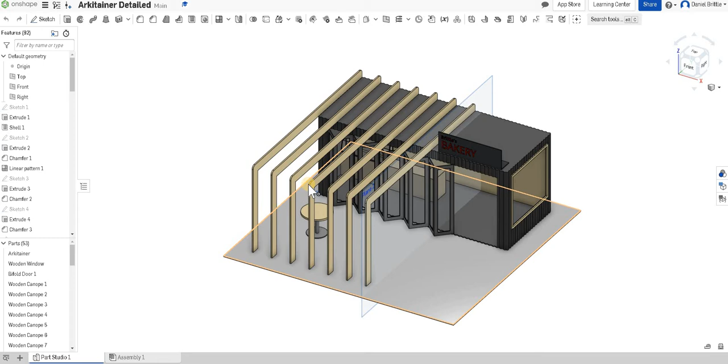I'm going to add a rail that goes from the side of the Arkitainer all the way up to the front and across through this wooden canopy and down here. Just a rail to enclose everything, an extra feature. We're going to use a sweep tool to do it.

The trick with this is that we're going across 3 work planes, which is going to make it quite tricky. So we're going to have to create quite a few work planes in its construction.

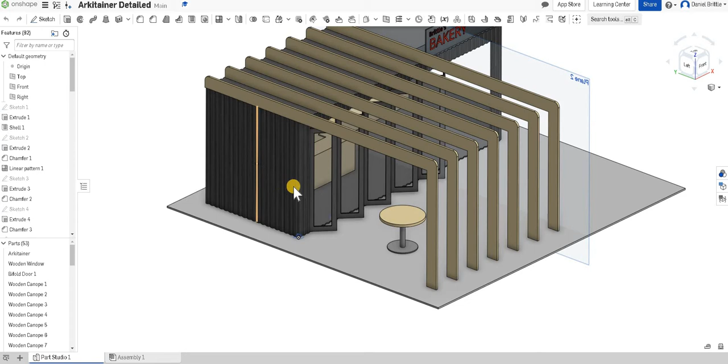The first work plane we're going to create is on this side here. We don't want it flush with the Arkitainer, we want it slightly out into this area. So we're going to select the right hand work plane, using the features list to select it.

Once that's selected, we can click on the plane option at the top here. It's the one that looks like a square with a small square in a corner. Hover over it and it'll tell you it's a plane.

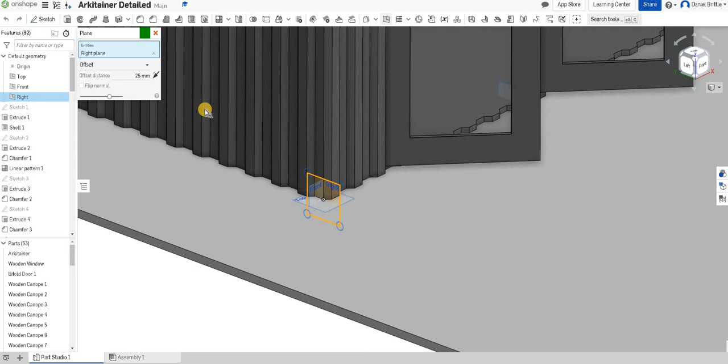You used it before, so hopefully you remember. We can see the arrows pointing the wrong way, so I just want to drag it in the direction I want to go. I'm going to look at it from the front so I can judge how far out that's going to be.

250-ish doesn't seem far enough. I'm going to take that to about 400, so it's much further to the left there. I'm happy with that, so I can finish it with a tick.

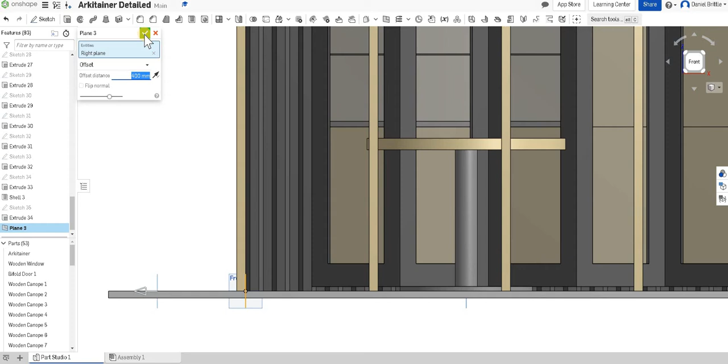Now the next work plane we need is the one that's going to be the height of the handrail. If we use this floor as a guide, we then select the new work plane feature at the top, and we're going to use the arrow again to drag it up.

This time I know what distance I want. I want about 800 from the ground, a very typical handrail kind of height in my opinion. You might well prove me wrong, but that's what I'm saying. And then we can finish that with a tick.

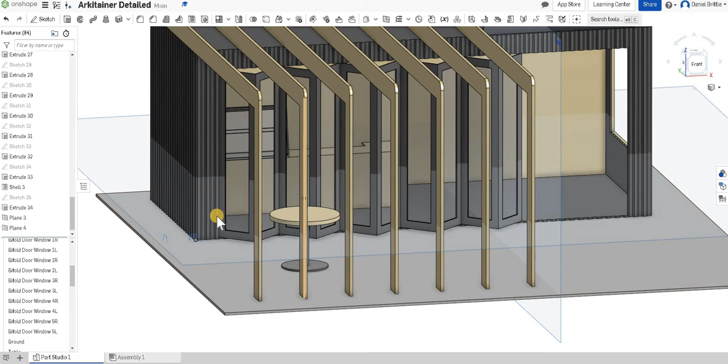The final handrail length is coming up and across along this work plane, and we need to come back down just over this side. It's slightly further, unfortunately, than this plane that we've already created.

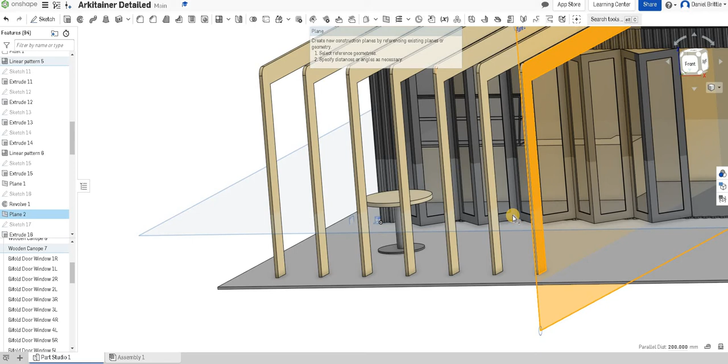So what I'm going to do is select the side of this face, create a new work plane here. In fact, that's the wrong work plane, sorry. I'm going to create a new work plane for it to come down.

That one is going to be lined up with the front work plane, selecting it from my features list. And then I'm going to create the work plane so that it is bang in line with where I want to create the handrail coming down here, which is halfway through this wooden canopy.

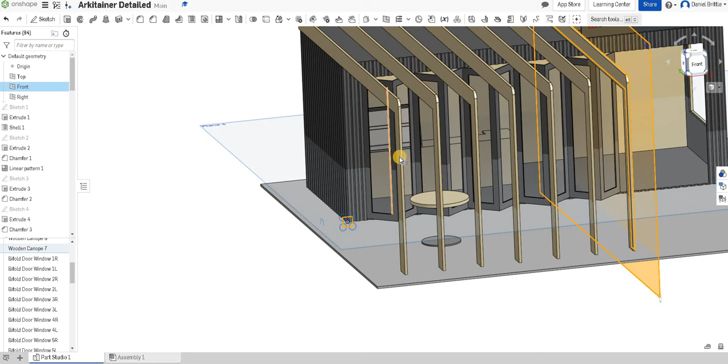So select the work plane. I'm going to view it from the left and zoom in. Actually, I'll just put the distance in, and we'll do it a slightly different way this time.

The distance is going to be, let's say, 1000, and let's see where that disappears to. You can see now it's telling me I've selected too many things, so let's close the 2. I just want the front plane in that options box.

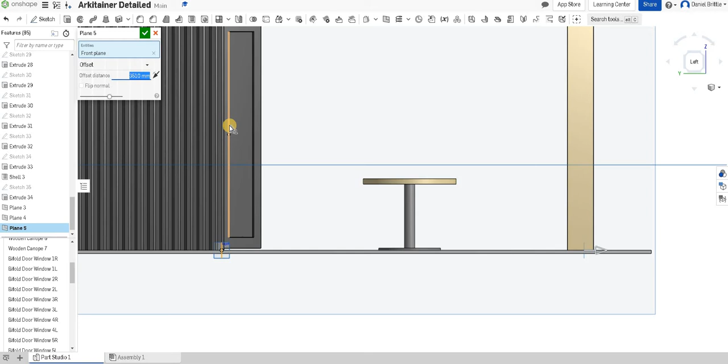You see 1000 is nowhere near, so I'm going to drag it across to about the centre, which looks like it's going to be about 3500. Okay, we can finish up with a green tick.

So now we've got the 3 work planes that we're going to start to draw the line that we want our sweep on. This is the line that the handrail will follow, coming up from here, across with a small round on the corner.

We don't want any sharp corners. All the way to this edge, round again, back through all these, round and down back into the floor. So we're going to start by drawing this section in here.

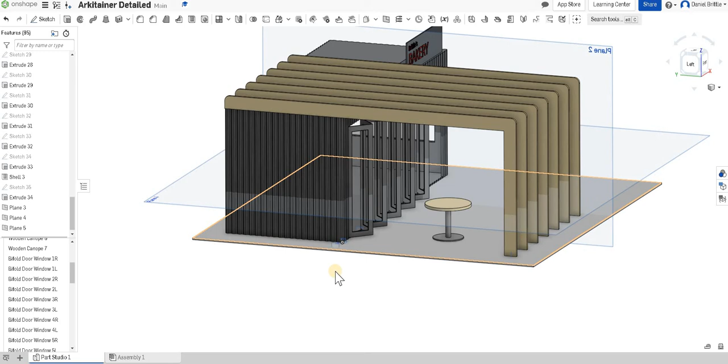I'm going to select the work plane we've just created, which is plane 3, using my features list. Start a sketch, looking at it from the left so it's square on, and I'm going to start by drawing in here just a rectangle roughly where I want my handrail to be.

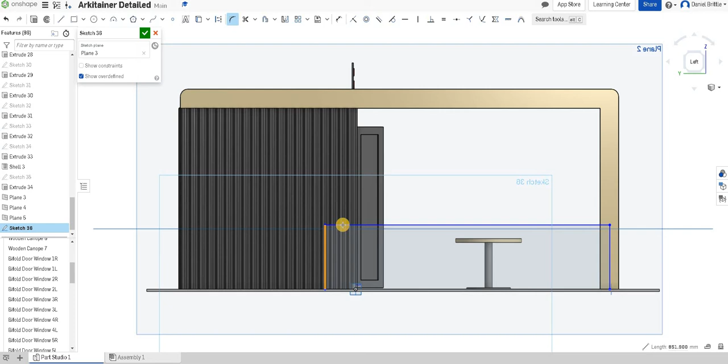I can then curve this edge with my sketch fillet tool. The sketch fillet tool is just up by the scissors, and I'm going to make that 300mm, so you can see it's a nice round there.

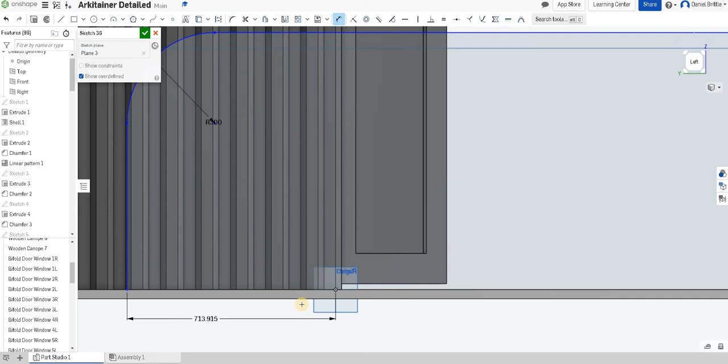I'm then going to use the dimension tool to start showing exactly where I want this. So we're going to measure from this central point, the origin, to the edge there, and we're going to make that around 800 back to start with.

So it's going quite a portion into the Arkitainer there. We then want to measure from this edge to the point. Don't measure off that line because we're going to get rid of that line in a moment, and we're going to make that 4,250. Okay, so you can see it's not far off the centre here.

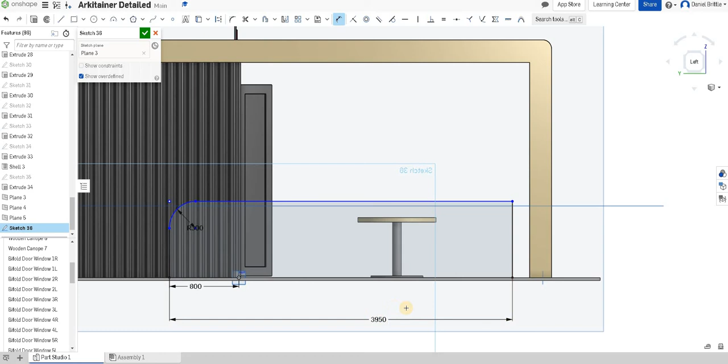We're then just going to take 300 off this to allow for the curve so it matches this, but we're not going to do it on this drawing. So what we're going to do there is take that away from here, which will leave us with 3,950. It's important I don't just jump straight to that number, because we won't understand where we've got that from. So 4,250 minus the 300, which is quite important.

I'm then going to use the scissors tool here, the trim tool. I'm going to cut away the bottom part of the rectangle and this right hand side of the rectangle. So I'm just left with this line that I'll sweep along to here.

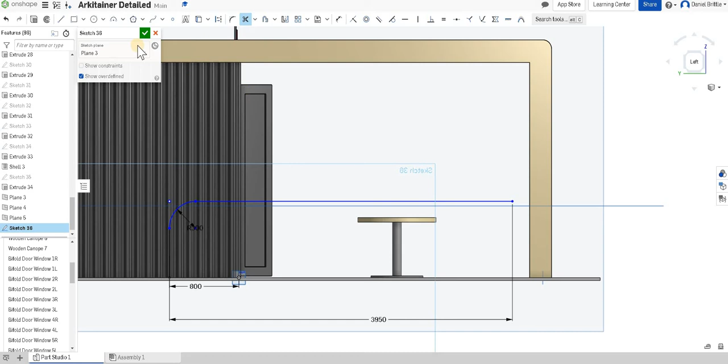The next curve is then on a different work plane, so I'm actually going to start sketching a line now on a different work plane. So I've finished that sketch even though technically it's incomplete. You can see it's finishing there, so it's important. I'm going to try and connect to that point in a moment.

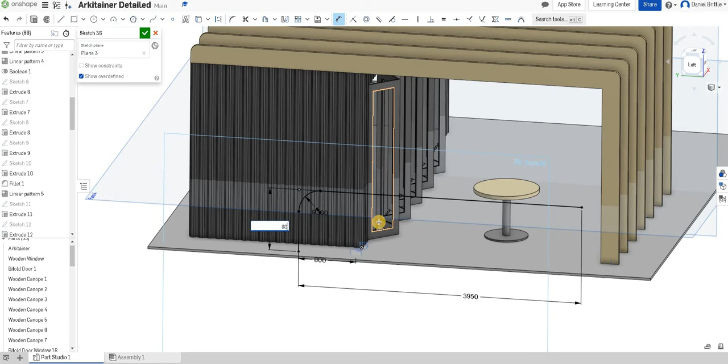So if I go back into this sketch, I've actually forgotten to do the height of the line, which was a bit silly. So I need to make sure that from that point to this line, that should be 800, otherwise it won't match the work plane that we've created. So now that's 800, it matches the work plane and it'll marry up.

So on this work plane, plane 4, select it in your features list if you're struggling to select it on there. We're going to create the sketch, and I'm going to look at it from the top so I can see where it is. We can see the point of the line now is here, and we're going to draw that again as a rectangle, so it makes it a little bit easier. We can then add our dimensions to it.

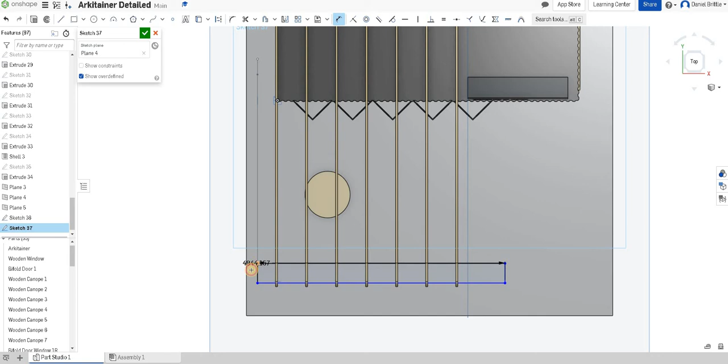So this line here, the distance from there to that point is going to be 300. That's the amount of curve that we're going to add in a second. And then the length of this line, we want it just poking out the side here really.

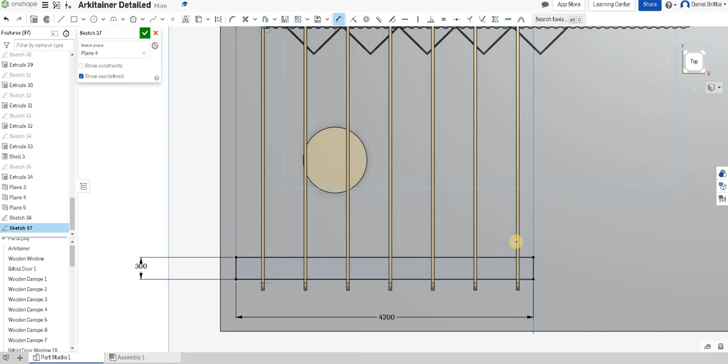So if we go to 4,100 and see where that takes us, that's coming out. I want it a little bit further, so let's go 4,200, and that will do for now. Okay, so 4,200 is good, 300's fine.

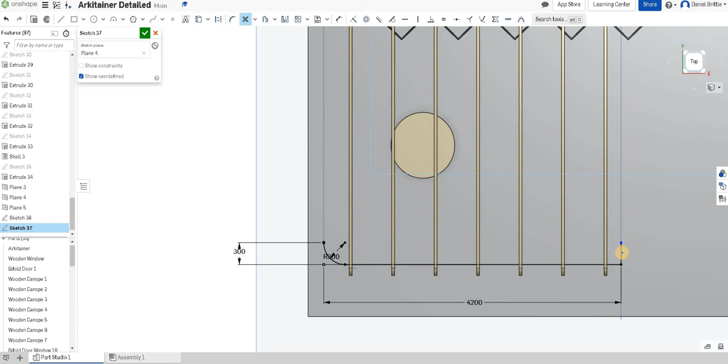We just need to add that curve and trim away like we did a moment ago. So line to line using a sketch fillet tool. That's putting my curve in nicely. Trim this big line of the rectangle, we don't want that little one there either, and that one there we can get rid of. And then if we finish that, so let's click our green tick and zoom out, you can see it now looks like a continuous line even though they're drawn on separate work planes.

The final one is here. So this is the work plane that we've created. It's going to be easier to select that one from the features list. Starting a sketch, and this time I'm going to view it from the front, and we want to carry on.

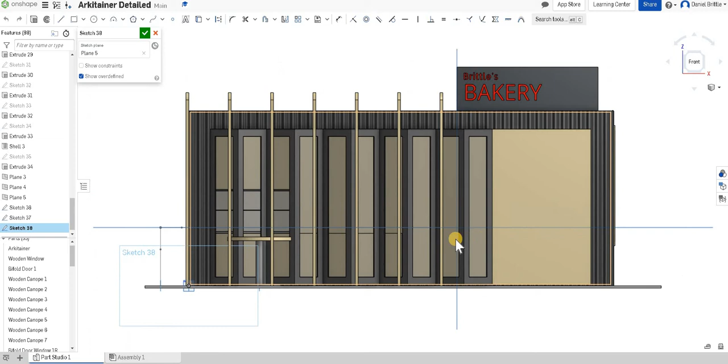It's quite hard to see in there, but the line is roughly here, and we want that to come down, so you can see the lines finishing there. So it's coming all the way through, finishing here, and then we want it to curve down to the floor. We want it to touch the floor so we don't see the end of the pole.

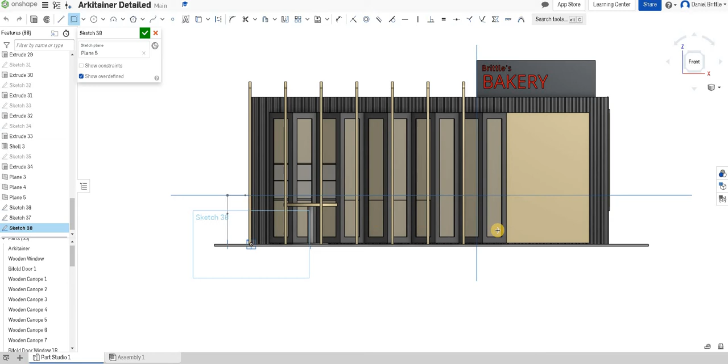So a rectangle again. Hopefully this is going to let me select it quite nicely. If it doesn't and you're having trouble, don't worry, we can constrain it anyway. So I'm going to draw the rectangle on here, and I'm going to start to add my dimensions.

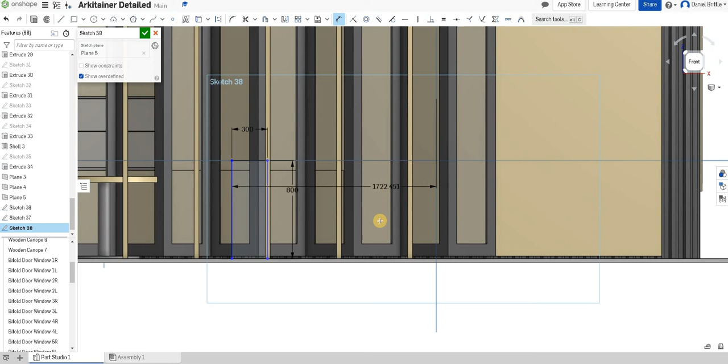So my first dimension is going to be this side here, which is 300 to allow for that curve. The next one this side is going to be 800 to get it to the correct height, and then distance from that line to here should be 0. Okay, so you can see now that should be connected up there, and we'll find out when we do the sweep if that's worked correctly, but it does look to me like that's lined up.

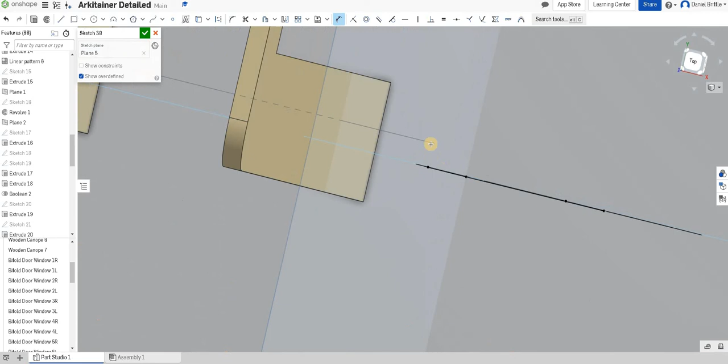So if we rotate that round, you can actually see where our problem's coming from. Our line does not match up with our front work plane, and that's why it wouldn't snap to it a moment ago. So we're going to have to fix that before we move forward, and we'll come back into the sketch in a moment.

So let's try and figure out what's going on here. First, let's figure out the distance that work plane was created. So plane 5, I'm going to edit, and it's saying it's 3,500, measured from the front work plane.

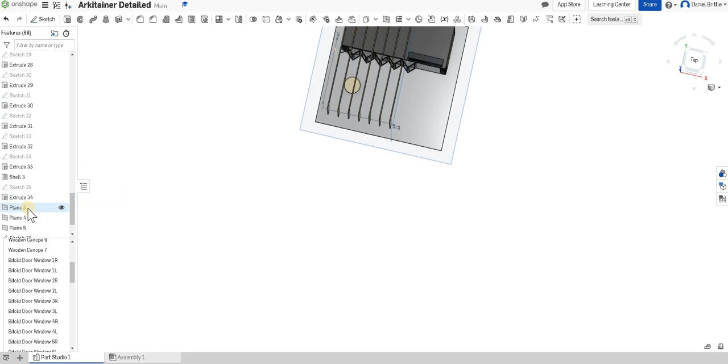Okay, so then if we go into the original sketch for the first line, sketch 36, and we edit, we know that this line was 3,950 from back here, but we don't know what it is from the front work plane.

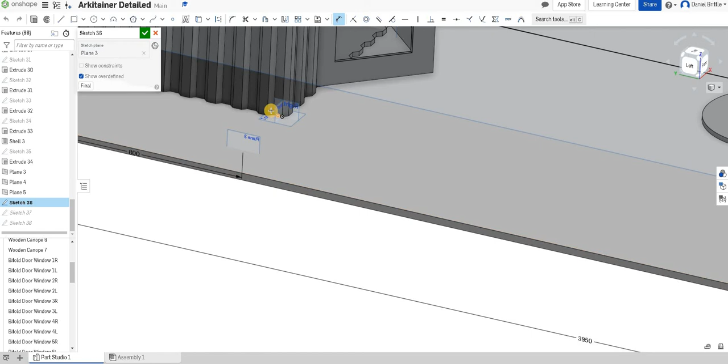So we're going to measure, and we won't be able to change it straight from this, but from the front work plane, so the origin really, to this end point needs to be 3,500, but then allow for the 300 in the bend, which actually gives us 3,200. So that tells us this 3,950 is 50 millimeters out.

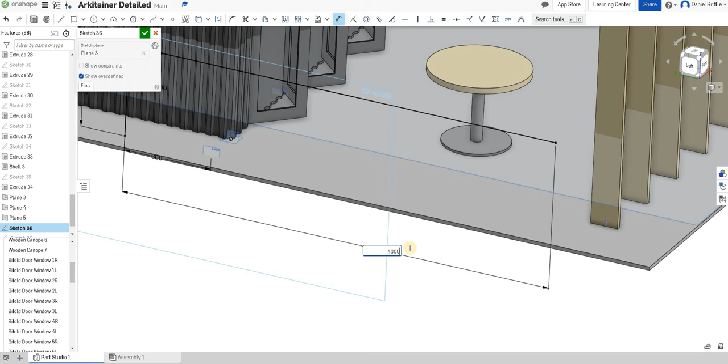So if I just cancel that, okay, let's delete that dimension out. Let's change this to 4,000 and then see where that takes us. I'm hoping now that will move everything along nicely, and we should see that that is now lined up. So it's really important that we're checking our dimensions as we're moving through and checking visually that things line up. It helps you see and spot errors quite easily that you can go in and fix.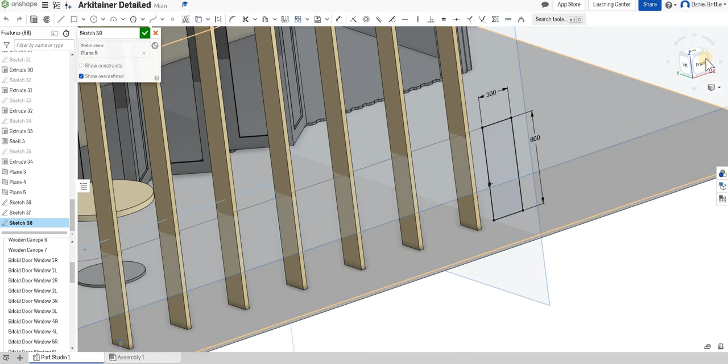So let's go back into this sketch now, looking at it from the front work plane. We're going to add that curve on and delete the two edges just like we did on the other two. So let's go to sketch fillet from the top to the right hand side. 300 is what we want. We press enter. Using the trim tool, we're cutting this side away. That's a dimension tool, it helps if I select the correct one, doesn't it? And then there we go, we can delete those few edges.

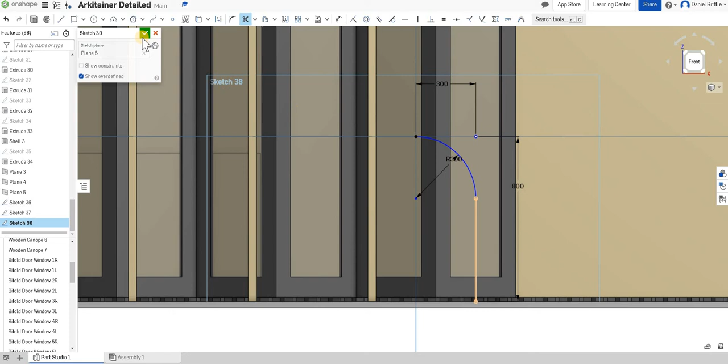Okay, for a sweep, you need two different things. You need the path that the shape is going to go along, and then you need the shape that you want to send along that path.

So we're going to draw a circle on the end, on this point here as the origin. I'm going to use the sketch tool. I want the sketch to be on the floor, so I'm selecting face of extrude 15 in my example, but I've just clicked on the floor. Click the tick, and then we're going to draw our circle.

You could literally play about with any shape you want here, but handrails are typically circles, and I think we're aware of that. So I'm going to go back into here. I don't know why I clicked the tick, that was silly. Circle, draw my circle, and dimension it as well.

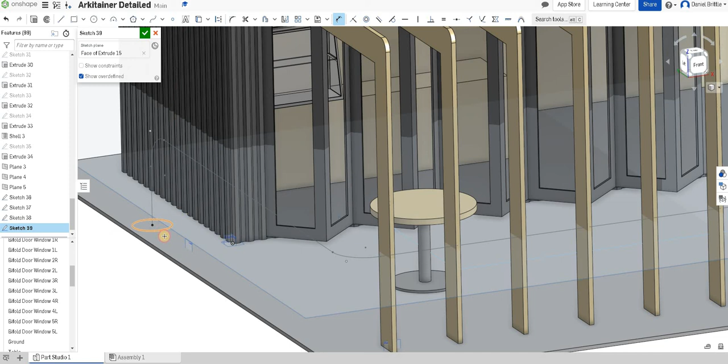And the dimension for this is going to be 80 millimeters. I don't think that's allowed me to do that very well, so let's delete that dimension out and try again. So let's dimension. Now line there and change it to 80, press enter, and it's saying that we're locked at a tangent here.

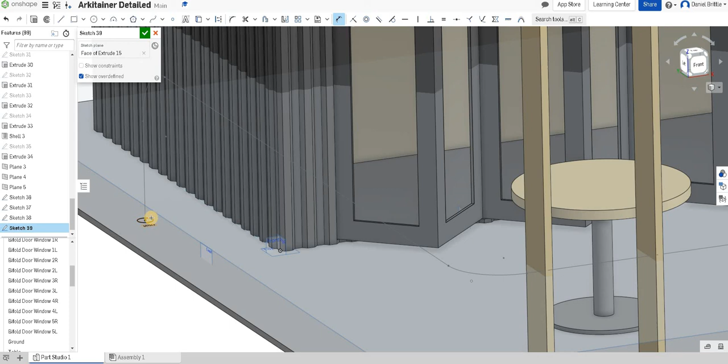So let's delete this constraint, left click on it and delete, and then it'll move there if yours has done the same. Okay, I'm happy with that shape now, so now I can do my green tick. That's the correct point too, not the other one, because then it's just a mistake and you'll have to open it up again. Bit silly, sorry.

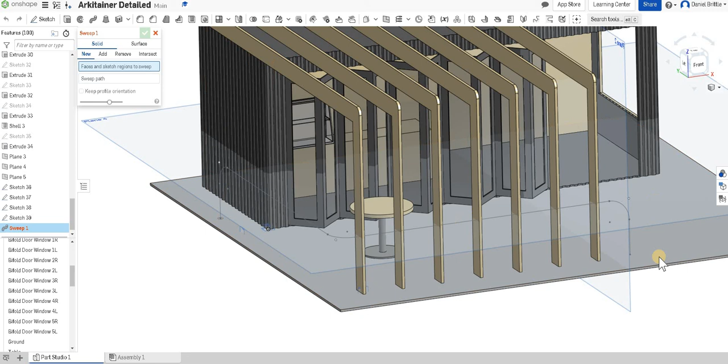So now we want to sweep that shape along this handrail. So this is a good bit. We want the sweep tool. This will not work if this isn't a continuous line, okay? So it's really important we get that line right. It's so vital to make this work.

Just position it in the middle so we can see it all going in one go. Faces and sketch regions to sweep, so that's the shape, that's asking you for the shape that you want to send down that path. So click on it once and then zoom in and select your shape. Next part now, you can see it's put face of sketch 29, 39 sorry, in there as well. The path now, the sweep path, is that line that we spent so long creating.

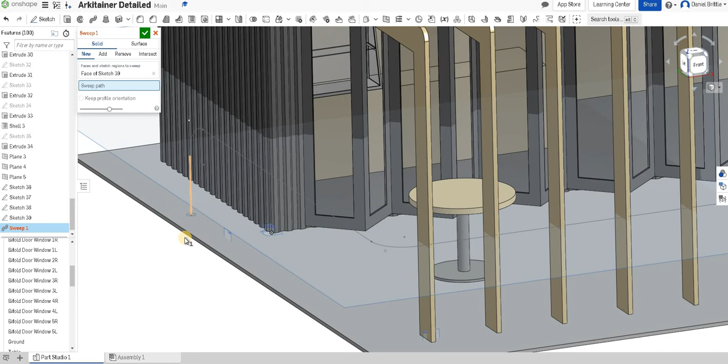So sweep path, and I'm going to select that path there. You can just keep clicking on these lines. Alternatively, you can select all of the sketches from here. So let's delete them edges, and I'm just going to select the 3 sketches that I want it to sweep along. And you can see now that the handrail is swept all the way through.

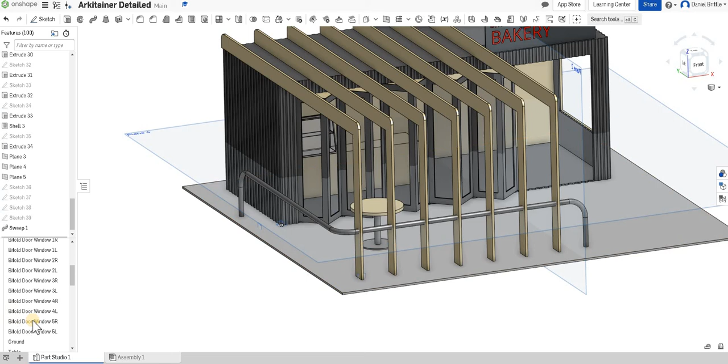If I finish that with a tick, you can see the handrail looking quite nice. What I'm going to do is just change the colour very slightly. So right click on part, edit the appearance. I'm just going to make it a lighter grey to look more like a silver or metal handrail, and you can see that's adding quite a nice detail to my bakery.